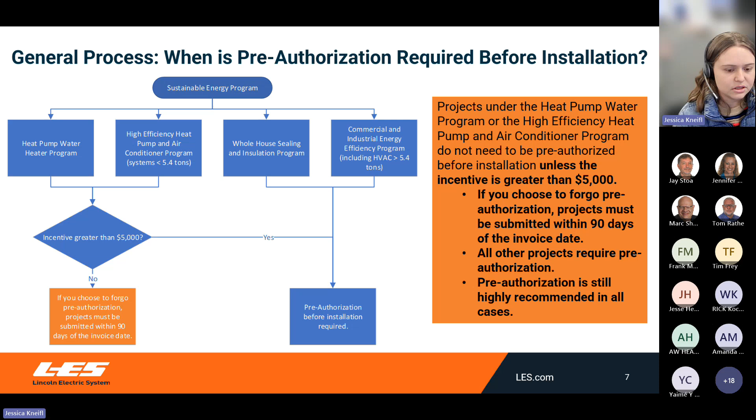Keeping that in mind, I do want to stress that we still are always encouraging pre-authorization. The benefits are: LES reserves funds. Each year we have a limited pot of money, so pre-authorizing makes sure that LES still has funds available. And number 2, it gives the contractor the ability to double check that what they're proposing to the customer qualifies and meets those energy requirements.

This is our general process for when projects are pre-authorized before installation. Again, that main benefit is that funds are reserved once LES pre-authorizes a project, and this does have to occur before installation. From that pre-authorization date that LES says yep, this looks good to go, for existing residential you have 90 days to complete the install, and for commercial or new construction residential, you have 180 days to complete the install. We do recognize that sometimes timelines shift or equipment doesn't arrive on time, so if you need additional time, we do offer the ability to grant you an extension as long as you indicate why you need an extension.

The last thing I want you to keep in mind is that, as always, LES does not issue reimbursement until the project is complete. So once you have completed your project, that is the point at which you should be requesting reimbursement. And as a reminder, incentives cannot exceed 50% of costs directly associated with equipment, material, and contractor labor for purchase and installation of qualifying measures.

This is the general process flow for when projects are not pre-authorized. This is not available for our commercial and industrial energy efficiency program or our whole house sealing and insulation program. But if you are installing a heat pump and choose to submit it to LES after the fact - the contractor decides to forgo pre-authorization - you complete your installation, and as long as reimbursement is submitted within 90 days of the invoice date, LES will accept that. Just a final reminder, that 50% rule is also applicable for projects that are not pre-authorized.

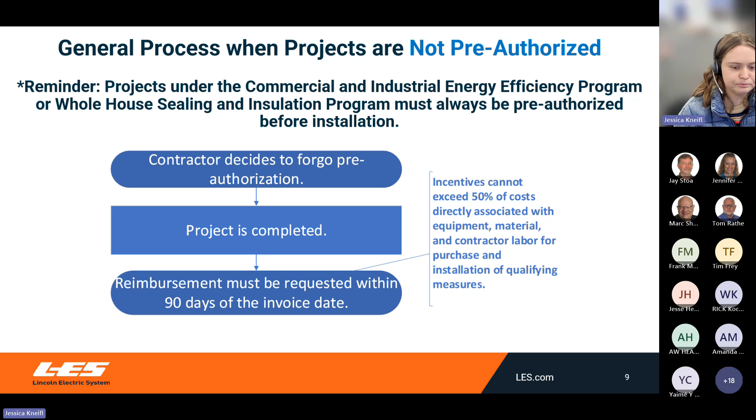Going into our heat pump water heater program. The incentive for heat pump water heaters for 2025 remains unchanged, so it's still $500. Keep in mind that residential or commercial can still qualify. And again, this is a program that you can either choose to get pre-authorized before installation or get it submitted within 90 days of the invoice date, assuming that the incentive is less than $5,000.

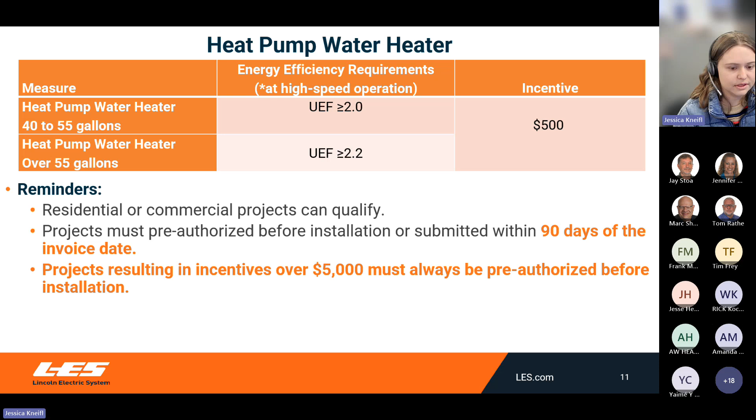Documentation requirements for this program: we are still requiring a plumbing permit, and we still require an AHRI sheet be attached to the project. As a reminder, contractors, if you are providing the LES incentive listed on the quote, just make sure that you're adding that disclaimer that says pending LES approval. And as always, we do request that you are placing the model numbers and the LES incentive on the invoice so that we can verify that the customer is in fact receiving the money. This right here is just a screenshot of our system.

So if you go to submit a project and you choose not to go through pre-authorization, just something to keep in mind, we did add this field where it says, do you want to bypass pre-authorization and request reimbursement? If you want to request reimbursement right away, you would just make sure to select yes, and then make sure that you're also attaching the invoice to the project at this point.

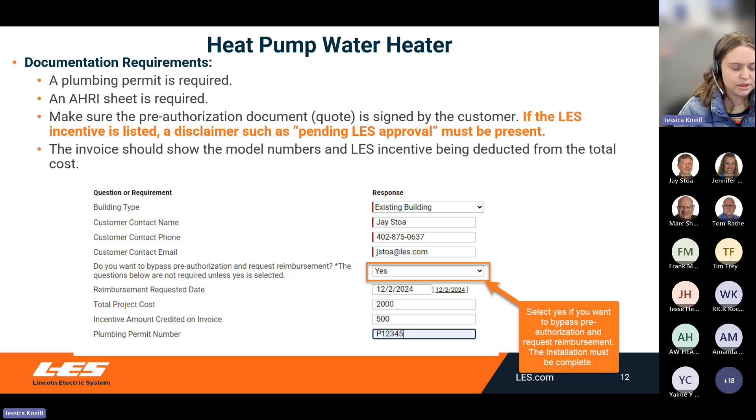Going into our 2025 whole house sealing and insulation program.

So this is the incentives chart. We simplified this chart, so attic insulation will automatically qualify, assuming that the existing insulation is 6 inches or less, and the new insulation being added is R49 or greater. Our exterior wall insulation incentive will qualify as long as there's no wall insulation present and you are adding insulation of R13 or greater.

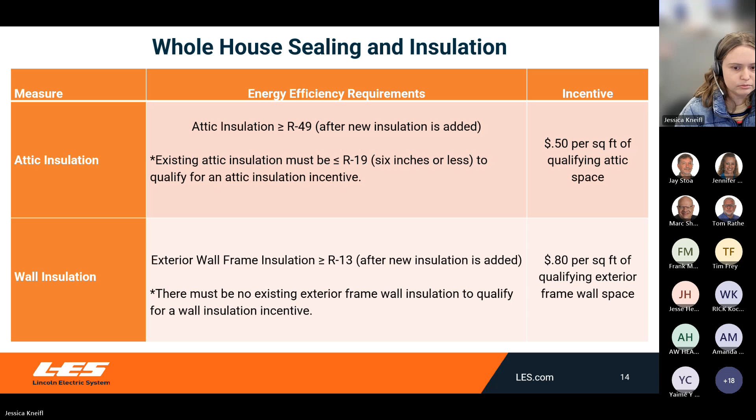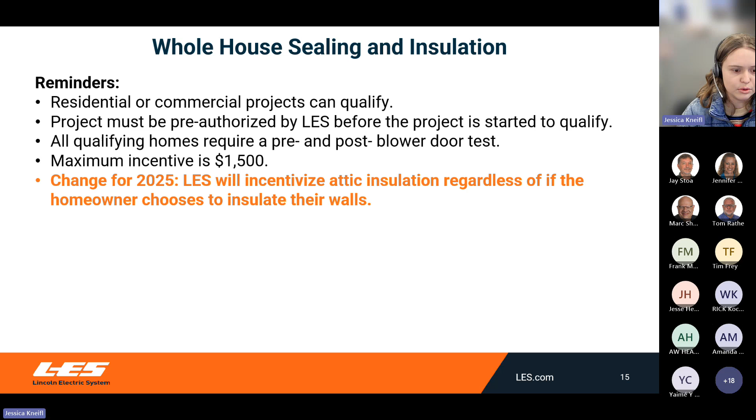Going into our reminders for our whole house sealing and insulation program. This is applicable to either residential or commercial projects. Please keep in mind that this program still requires pre-authorization for any project to qualify. All qualifying homes also require a pre and post blower door test. The maximum incentive is still $1,500. And just to summarize, LES will incentivize attic insulation regardless of if the homeowner chooses to insulate their walls.

Documentation requirements for our whole house sealing and insulation program. Just as another reminder, if you're listing that LES incentive on your quote, make sure that you add the disclaimer that says pending LES approval. For a wall insulation incentive, we are requiring for 2025 that the contractor provides a calculation that shows us how you determine that wall square footage. The calculation does have to assume a 15% deduction for doors and windows.

And if you are doing an insulation incentive, we are requiring pre and post insulation photos. In both instances, for those insulation photos specifically, we do need an overview picture of the attic, and then we also need one that shows a tape measure to give us an idea of the existing depth of attic insulation. And as always, the invoice from our insulation contractors should include the LES incentive being deducted from the total cost. And we are requiring those blower door test results be provided.

Going into our 2025 high efficiency heat pump and air conditioner program. Something to keep in mind as I go through this is it is applicable to both residential and commercial systems, but the key thing to keep in mind is this is for smaller systems only, so 5.4 tons or less.

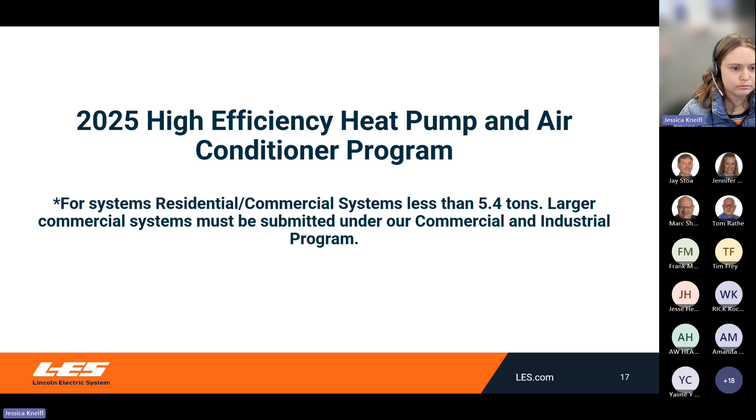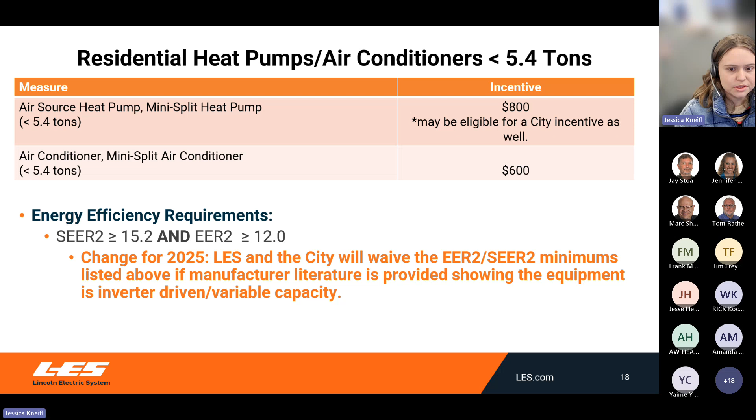Regarding the reminders, make sure that you place a disclaimer on your quotes saying that the incentive is pending LES approval. We also are giving the option to bypass pre-authorization for this year, for 2025. So if you decide to bypass pre-authorization, make sure that it is submitted within 90 days of the invoice date. And another thing I want to point out is that LES is still requiring EER2/SEER2 ratings. So if you have a piece of equipment that might be a little bit older and only has EER and SEER ratings, that will not qualify for our incentives.

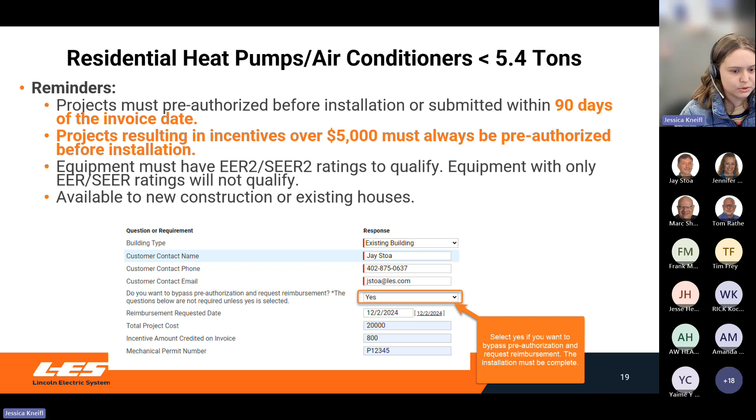This down here is just a screenshot of our system. So if you decide to bypass that pre-authorization, you would just select yes, and that indicates to LES that you want to request reimbursement right away. And as a final reminder, our incentives for this program are available to new construction or existing houses.

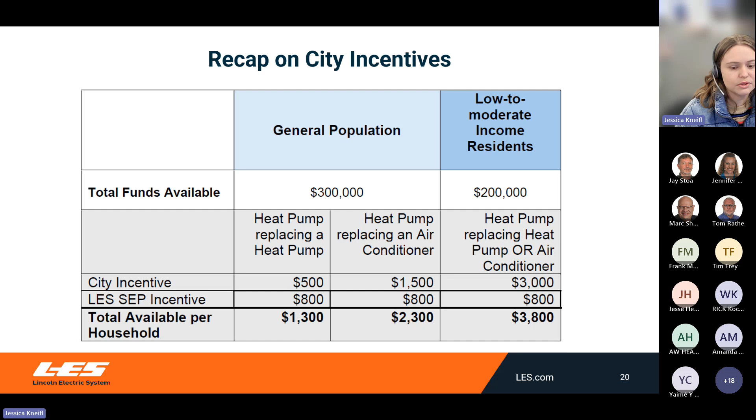This is a recap on city incentives. This is what's currently in place as of October 1st, and this will not change for 2025. So heat pumps replacing an air conditioner will still receive that higher incentive.

Just a recap on who is eligible. The resident does have to live within the city of Lincoln, and it can either be a single family detached home, or if it's a row home, townhome, condo, or duplex, it does have to be owner occupied. It can't be a renter living in those units.

What is eligible is either an air source heat pump or a mini split heat pump. Something to keep in mind for the city incentives specifically, it does have to replace an existing system. That existing system can be a window AC, but as long as that existing system is at least 5 years old, it would qualify for an incentive. The last thing to keep in mind is the city does have the same energy requirements as LES, so it either has to have those SEER2/EER2 minimums, or if it is inverter driven, that will also qualify starting January 1st.

What is not eligible? The key thing I want to point out is that for the city incentives specifically, more than one heat pump per household cannot qualify for a city incentive. So if you are an HVAC contractor and you are installing two systems, you could potentially get two incentives from LES, but the customer would only qualify for one city incentive. And again, installation of a new heat pump without replacement of an older system also does not qualify. If you're just adding a new system rather than replacing, that would not qualify.

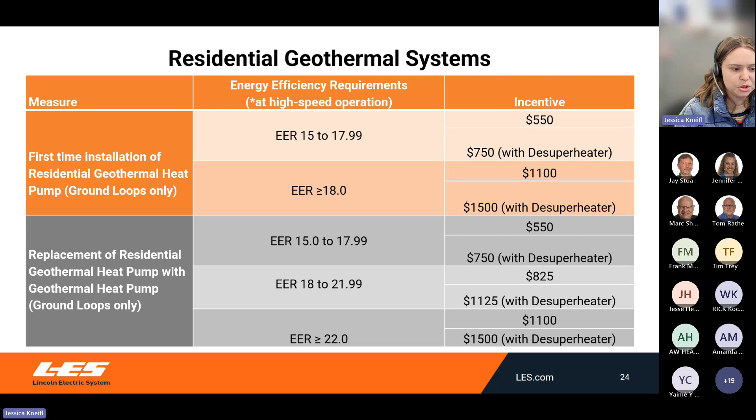Just an overview of residential geothermal systems. This chart has not changed, so I won't go too much into it. Everything on this chart is the same as 2024.

For commercial heat pump and air conditioner incentives, this mimics the residential incentives. And again, we will automatically let inverter-driven equipment qualify.

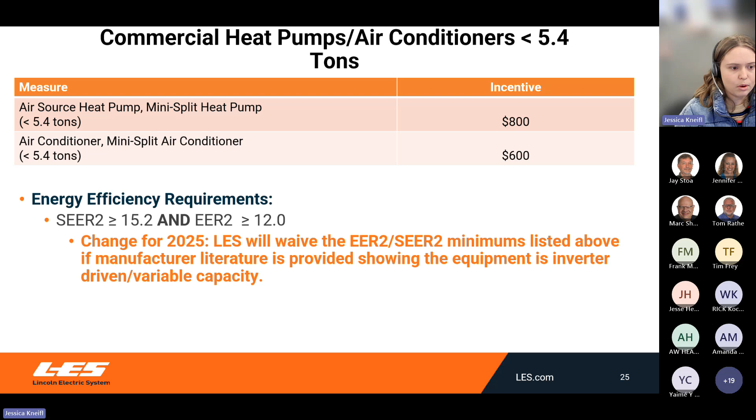Going into our reminders for the heat pumps and air conditioners, for systems less than 5.4 tons, you can either pre-authorize the project or submit it after the fact as long as it's within 90 days of the invoice date, assuming the incentive is less than 5,000. HVAC contractors, if you have a commercial system greater than 5.4 tons, you need to make sure that we get that submitted under our commercial and industrial energy efficiency program. Your first step for getting those submitted is actually to email us at sep@les.com, and we will submit that in the portal for you.

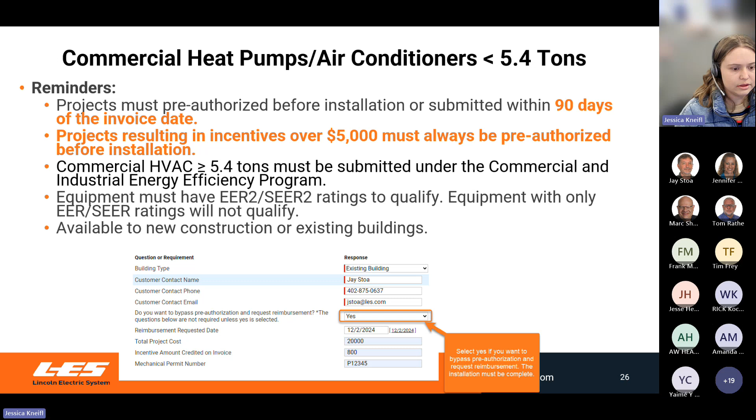The same EER2/SEER2 ratings are required. So if you have equipment that is only EER and SEER rated, that would not qualify for an LES incentive. This is also available to new construction or existing buildings.

Going into our documentation requirements for this program. If you are listing the LES incentives on your quotes, make sure that you add that disclaimer that says pending LES approval or something along those lines. We are still requiring a mechanical permit.

Something that's changed slightly is AHRI certificates. As you guys know, we've always required those in a sense. We no longer will have our AHRI lookup for 2025. So what you'll do for 2025 is type in that reference number into this field, and we also have a slot for you guys to attach those files directly to the project.

For the inverter driven equipment, if you have something that is inverter driven, but maybe it only has an EER2 of, let's say 10, so it doesn't meet our EER2 minimums, to make sure that our system allows you to bypass those minimums, we do need to make sure that you're checking this box right here. This box basically tells our system that this has been identified as inverter driven, so it doesn't need to meet those EER2/SEER2 minimums.

As a final reminder, as always, the invoice should show all model numbers and the LES incentive being deducted from the total cost.

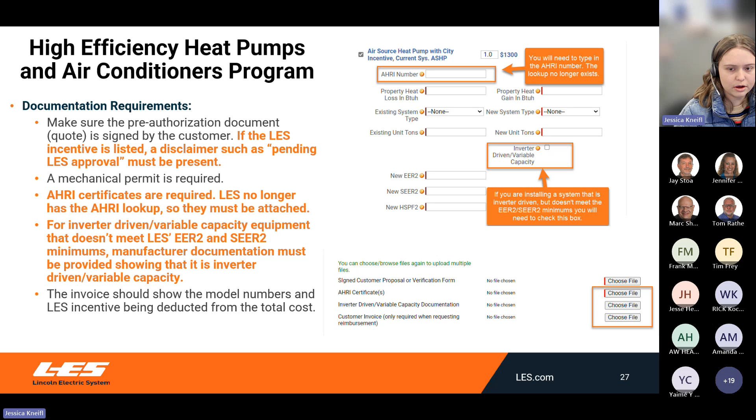For our 2025 Commercial and Industrial Energy Efficiency Program, this is a program that requires pre-authorization before installation. The first step for any project under this program is to reach out to sep@les.com. Depending on what the project is, the requested documentation will vary. Once we've received that documentation and determined that it qualifies, LES will pre-authorize it in our system, and from that day funds are reserved for 180 days. If you need additional time, extensions can be granted at the discretion of LES staff. As a reminder, all equipment must be operational and final invoices provided before reimbursement is issued.

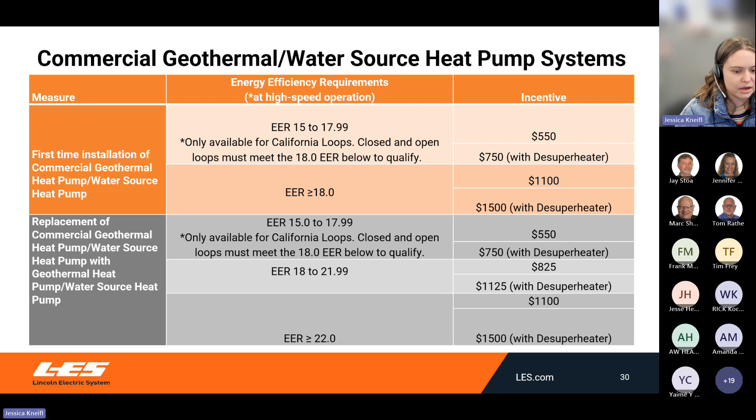Going into our incentives for commercial geothermal and water source heat pumps. Something that's new on this chart is that previously LES did not offer incentives for replacement of geothermal heat pumps or water source heat pumps, and we are letting this qualify in 2025. This section is actually new, but it does mimic closely to our residential incentives.

For our commercial systems greater than 5.4 tons, as a standard, the incentives for the most part will be $100 per ton. So if you have a 20-ton system, that incentive would be $2,000. We did make this prescriptive this year. Just some reminders: if you have something less than 5.4 tons, that can be submitted under the high efficiency heat pump and air conditioner program, but for larger systems you need to be reaching out to sep@les.com. For these projects specifically, we will ask that they be AHRI rated and that we also have a mechanical permit.

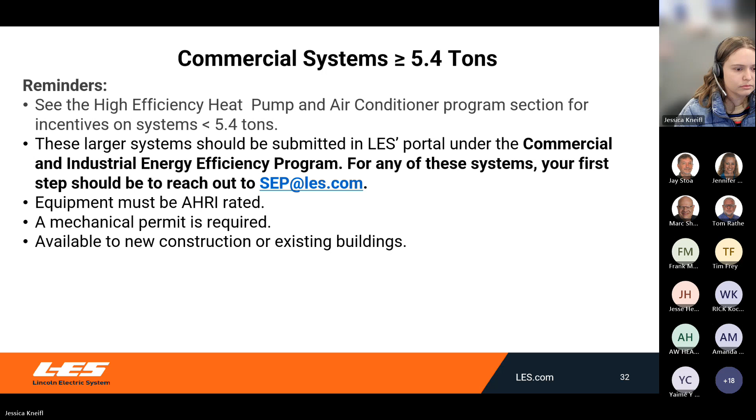For our energy management system and motion sensor incentives, the incentive will be the lesser of the following: 20% of the new system cost, 50 cents per square foot of floor space being served by the new system, or it caps out at $50,000.

Something to keep in mind for motion sensors that are directly embedded in the light fixture: lighting contractors, or contractors in general, if the control is directly in the fixture, the incentive will be $10 per fixture. We would not provide an incentive for the labor associated with installing the lighting fixture. This is really the only lighting incentive that we would have for 2025, if it has some sort of motion control feature.

Guidelines specific to energy management systems: this incentive is not available to new construction buildings, and the building does have to be at least 5 years old. The other thing to keep in mind for energy management systems or motion sensors is that expanding or optimizing an existing system can qualify, but replacing an existing system or individual controls does not. Essentially, as long as LES can justify that an improvement is being made, we would honor an incentive. If you're just doing a repair, replacing something or fixing something, and no true improvement is being made, that would not qualify for an incentive.

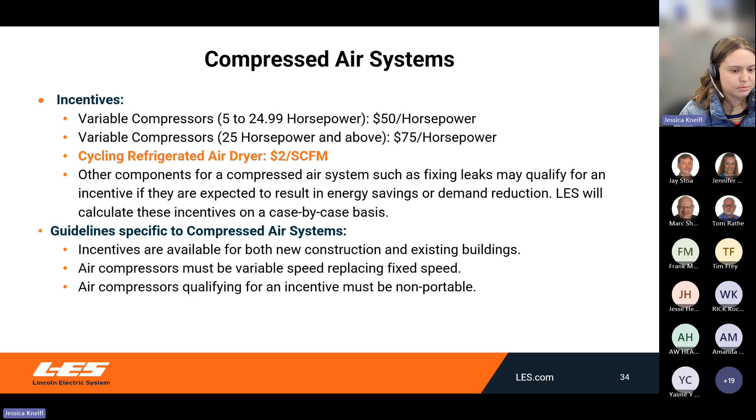For variable frequency drives, our incentive is $50 per horsepower being controlled. The main thing to keep in mind here is VFDs replacing existing VFDs do not qualify, but if you have a new construction building and you are installing several VFDs, that would qualify for an incentive.

Going into our Energy Star steam cookers, dishwashers, or combination oven incentives: this is new for 2025, and that incentive will be $800 per piece of equipment. For any of these incentives, they do have to have an Energy Star rating, so when you're looking at the specifications, if you're seeing that Energy Star emblem, that means it would likely qualify for our program. For any qualifying steam cookers, dishwashers, or combination ovens, something to keep in mind as well is they do have to be electric.

If it's gas instead of electric, unfortunately LES would not honor an incentive for that. To be eligible for the dishwasher incentive specifically, we are also asking that the building's hot water fuel type be electric, and if you have a booster water heater, that the fuel type is also electric. One other thing to keep in mind is if you had a smaller, under-counter dishwasher, that would not qualify for an incentive. But these are available to new construction or existing buildings.

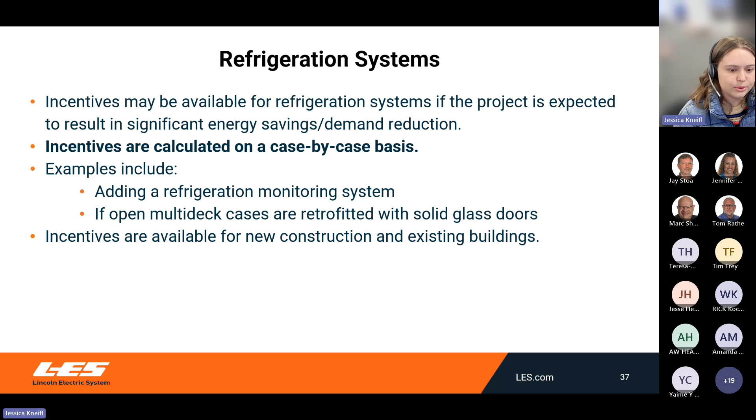Refrigeration systems - this incentive is calculated on a case-by-case basis. Some examples would be if you're adding a refrigeration monitoring system, or if you have multi-deck cases that are retrofitted with solid glass doors. Those are just some examples, it's not limited to that, but that's just to give you some ideas. This is available to both new construction and existing buildings.

Custom incentives - we have this bucket that we basically leave open. We realize our prescriptive incentives only cover a small portion of energy efficiency projects. So if you are doing a project that you think will result in energy savings or demand reduction, but don't think it necessarily fits into one of LES's buckets, don't hesitate to reach out to us. It still could potentially qualify for an incentive, calculated on a more case-by-case basis. The main thing to keep in mind is that we do have to receive proof that the project will result in significant energy savings and demand reduction.

Just as a recap of changes for 2025: making sure that contractors, if you're listing the LES incentive on the quote, that you are listing a disclaimer that says pending LES approval. For the high efficiency heat pump water heater program, pre-authorization is no longer required for incentives less than 5,000. Just making sure that if you are forgoing that pre-authorization, it's submitted within 90 days of the invoice date.

For the whole house sealing and insulation program, the key changes are LES will incentivize attic insulation regardless of whether the homeowner chooses to insulate their walls. And we are also requiring pre and post insulation photos for attic insulation incentives.

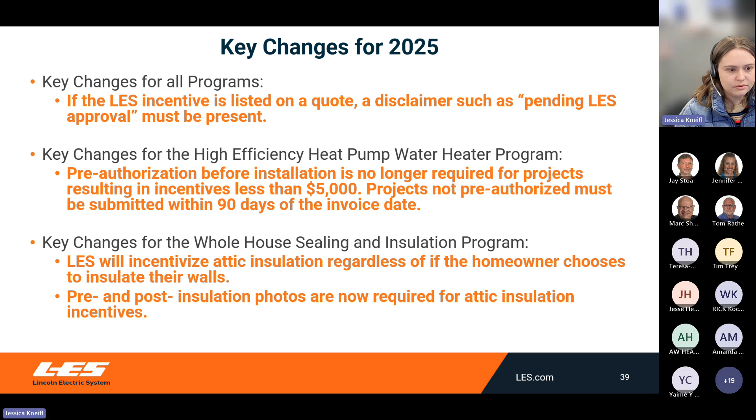For our heat pump and air conditioner program, this is also a program where we are no longer requiring pre-authorization as long as the incentive is less than 5,000. Projects do have to be submitted within 90 days of the invoice date if it's not pre-authorized before installation. The other change is if you can prove to us that the equipment is inverter driven or variable capacity, we will automatically let that equipment qualify, even if it only has an EER2 of 10 as opposed to 12.

The final change for the commercial and industrial energy efficiency program is LES did add several new prescriptive incentives. This is the contact information for myself as well as Jay Stoa, who is my counterpart for the program. The main thing to keep in mind is this SEP at LES inbox is actually a joint inbox, so if for some reason Jay or I are out of the office, the other person will see it. This is a good point of contact.